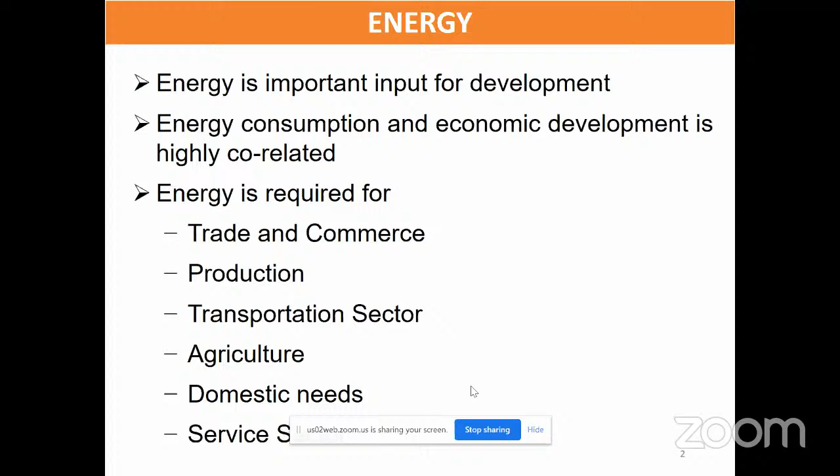Everywhere the sector needs developing infrastructure. Most office buildings are becoming air conditioned so that we can get more productivity from our workers. Earlier we used to have conventional sources of energy: thermal projects, hydropower projects, nuclear projects. After that we had non-conventional sources of energy: solar, wind, biomass, small hydro, geothermal, and tidal.

Hydro comes under conventional source of energy as well as non-conventional source of energy. The difference between these two categories: in conventional hydro, we construct a dam across a river, store the water, rising the water level by 100 or 200 meters, then we fall the water from that height for energy generation.

But in case of small hydro, we don't store any water. We just use whatever water is available in the river for power generation. So the difference is, during our monsoon period we have around 20 times the discharge available in our river. In conventional source, all that water was used by storing it, but in small hydro we don't store, so during monsoon a lot of water goes waste.

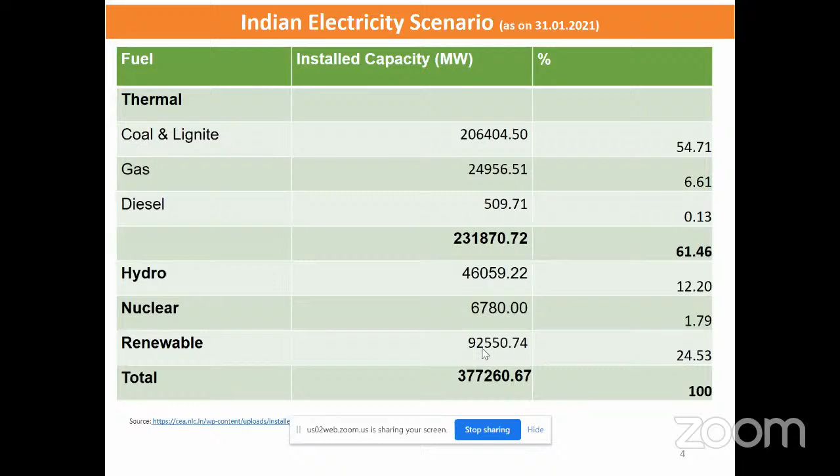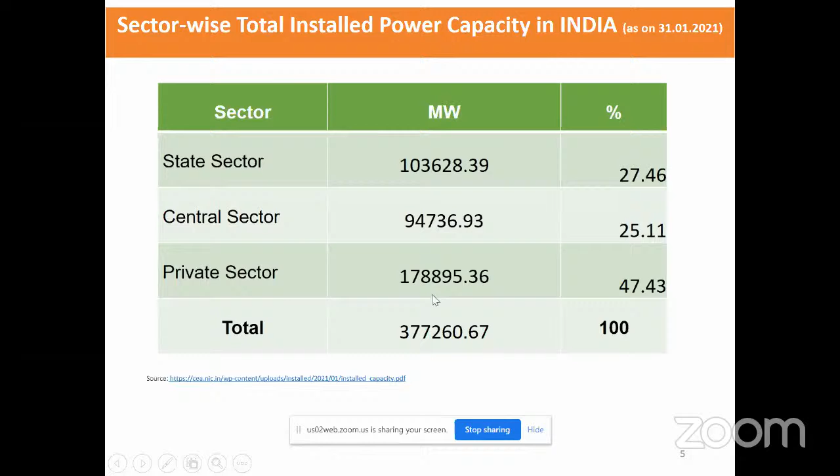Now the renewable energy contribution is 92 gigawatt, and the maximum has now come from solar power. Earlier wind energy was maximum, but now solar has taken over, and we have a lot of potential and plans for solar development. Maybe 2 lakh megawatt of projects are to be developed from solar energy.

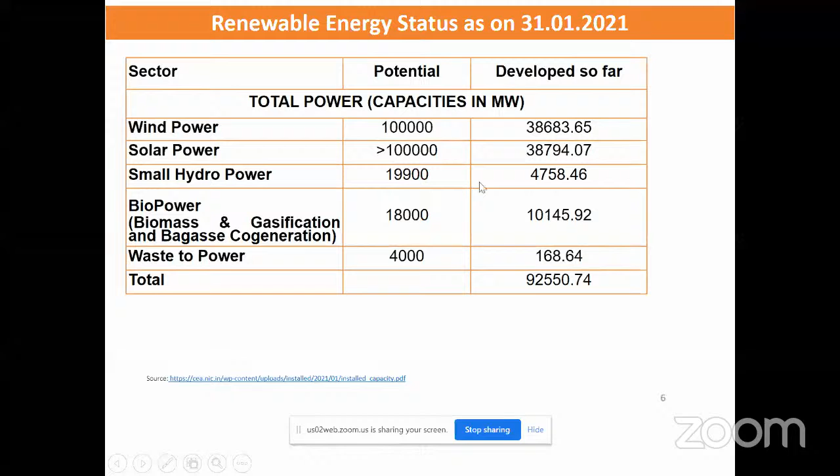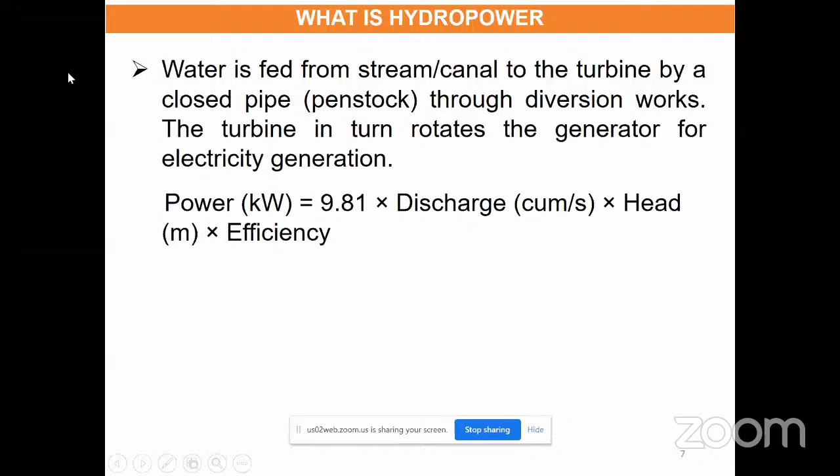This is a pure potential energy equation, and it is multiplied by an efficiency factor, because we cannot get 100% electricity by converting 100% potential energy into electricity, since all the equipment used in power generation has some efficiency. Now, head is the difference where power is generated at the powerhouse, and water is available at a diversion point. So the difference between the elevation of these two points is the head, as in case of potential energy also.

Now efficiency of our equipment, when we generate power from our hydro project: first is the turbine, then generator and gearbox. In the powerhouse, the potential or hydraulic energy is first converted into mechanical energy, because this energy rotates the shaft of our turbine. This shaft is connected to the generator. From generator we convert the mechanical energy to electrical energy. So first hydraulic energy to mechanical energy, and from mechanical energy we go to electrical energy.

So there is some efficiency loss due to turbine, some efficiency loss due to generator. Sometimes the generator and turbine have different rpm. To match the rpm, because the turbine generally rotates at lower rpm, maybe in the order of 500 to 600, the generator could be rotating at 1000 rpm or 1500 rpm. So there is a mismatch of rpm, and we need a gearbox in between. A 2% efficiency loss is there due to the gearbox, and combined efficiency will be turbine efficiency multiplied by generator efficiency multiplied by gearbox efficiency.

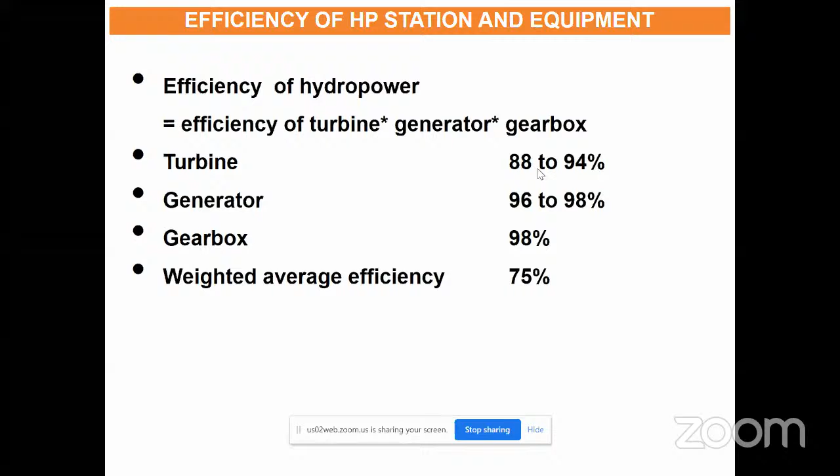And turbine efficiency, you just see it is 88% to 94%. Why is it so low? Because initially the turbine is at zero speed, and suppose the rated rpm at which power is generated is say 500 or 600 rpm. So from zero, when you start opening the valve, water starts going and it starts rotating. But if it is rotating first at 0 rpm, then 100, 200, there is no power generation. Only the energy available is consumed in running the turbine at that rpm. When the turbine reaches the rated rpm of 500-600, till that all energy available is wasted, utilized in running it, because sometimes the runner diameter of the turbine is 1 or 2 meters. So a 2 meter mechanical disc rotating at 500 rpm needs a lot of energy. That is accounted for in the efficiency of the turbine. That's why turbine efficiency is 88 to 94%, to take care of the energy required to run that heavy part at 500 rpm.

Why are these categories required? You will find a lot of changes in technology, and large and medium projects are commercial projects because they have to be designed and developed on a commercial basis. But small and mini projects get some subsidy from the central government to make them commercially viable. Micro projects of 100 kilowatt get around full subsidy — around 90% of the project cost is met by the central or state governments. So that's why we need these categories.

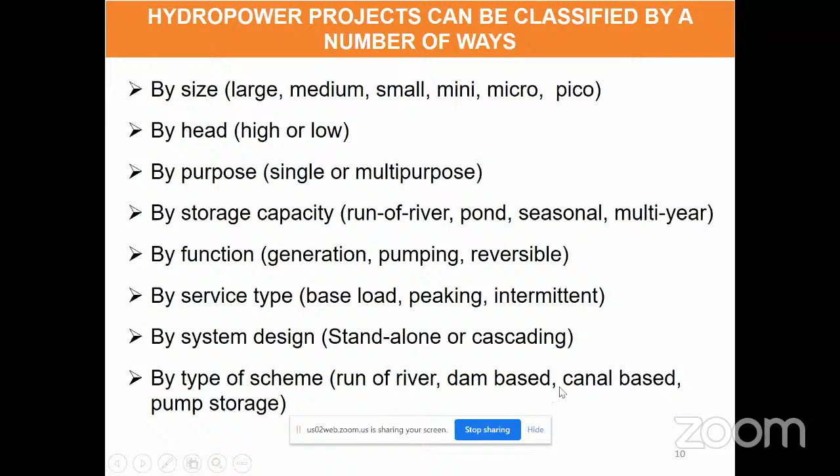Now by type of scheme, storage types are the same: run of river, dam based - when you construct a dam, and canal based - when you are developing the fall available in a canal. Run of river I've discussed a lot - no storage, output subject to whatever discharge is available. Canal based utilizes the fall available in the irrigation canal.

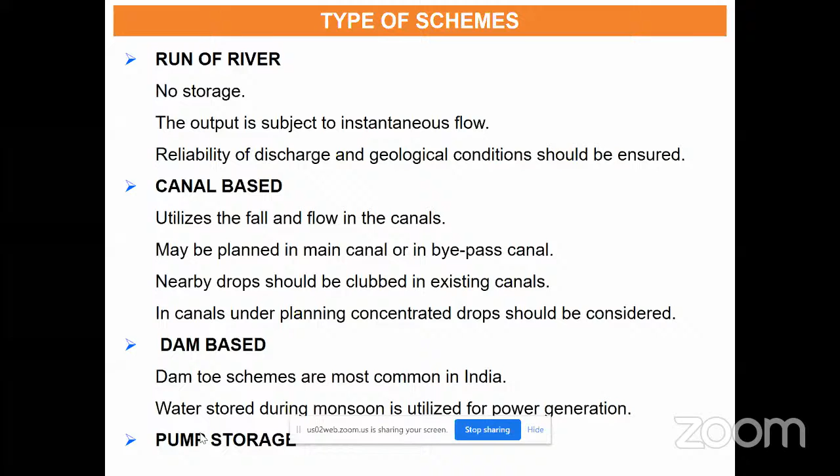Dam based - I'm discussing run of river or dam based basically, so you are not constructing any dam, you are utilizing an already existing dam. So when surplus water is there, that water gets wasted from the spillway of that dam, so that can be tapped for power generation.

This is a typical run of river hydro project. When water is going waste, flowing in the river, we divert the water for power generation through an open canal up to a tank at the end, called the forebay tank. From there we take a pipe for power generation at the powerhouse. After power generation, water is released back to the same stream. This is a very typical type of hydropower project.

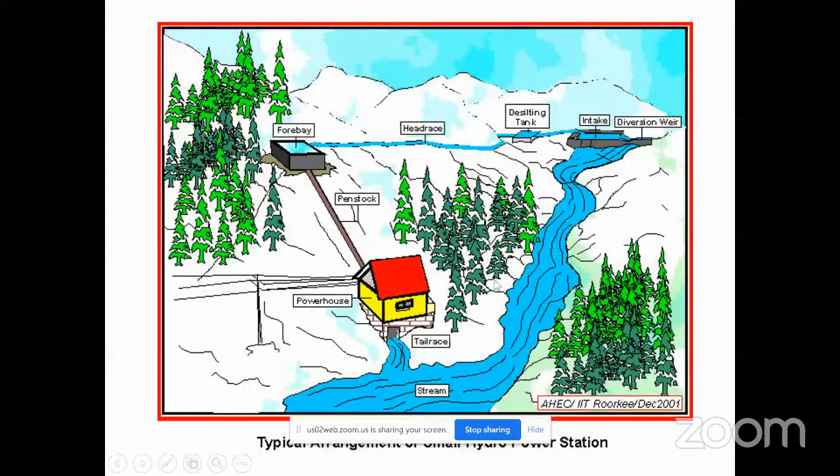Now the second type of project is canal based. All our irrigation canals mandatorily have a fall in the system. Why? The irrigation channel has a very mild slope, maybe 1 meter bed slope in 5 kilometers - you cannot visualize any slope in the bed of the canal. But our terrain, the normal ground, has a steeper slope, maybe more than 1 meter in 1 kilometer.

So our ground is sloping 5 times steeper than the irrigation canal bed level. This means after a length of 20 kilometers of irrigation, our channel bed is always higher than the ground. Initially we make it up by filling, but when the filling becomes too much, we provide a fall in the irrigation system, so that we cut our land and put it for filling upstream. So this becomes a fall.

These falls can be developed for power generation. Our center, personally myself, is involved in development of 21 falls in our Bihar project. They are around 20 megawatts of projects, and all these projects are being developed in consultation with our center. A lot of innovations were done by our center to meet the problems we face at these places.

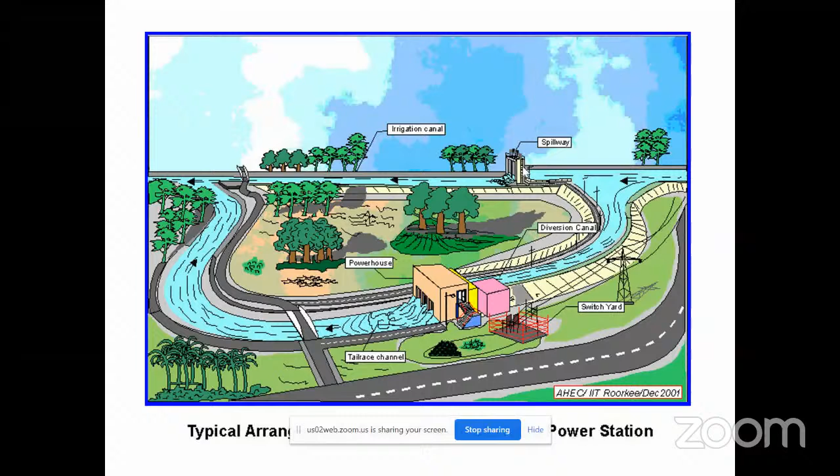Now the dam based project - what happens is a lot of the time this surplus water is going waste through the spillways. So we can use the under sluices already available in the dam body, and connect our pipe which is used for power generation. We develop a powerhouse which utilizes this to generate power.

Now I had shown the pumped storage configuration - upper reservoir, machines, and lower reservoir. Water from the upper reservoir comes for power generation at this project, and the water which is released is again stored at the lower reservoir. When we have surplus water, surplus energy available, that is used to run the machines in a reversible mode, pumping water back to the upper reservoir.

As an example, the Tehri project normal generation is a certain megawatt, but in the reversible pumped mode, it increases to 2000 megawatts. They have a lower reservoir - during off-peak hours, 1000 megawatt turbines are run in reversible mode to pump water from the lower reservoir to the upper reservoir. During peaking, the water already coming from the upper river is stored, plus the water pumped back from the lower reservoir is stored, so it becomes double the capacity.

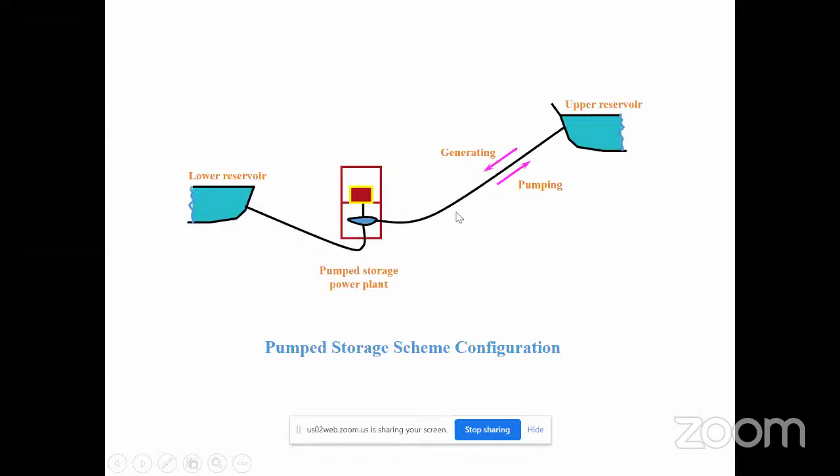Now this sketch shows the upper reservoir and our project here. Water is released downstream, and we have a dam on the downstream side also, so the water after power generation is stored in this reservoir. During off-peak hours, water is pumped back from here and stored, and during peaking, double the discharge comes from this reservoir for power generation.

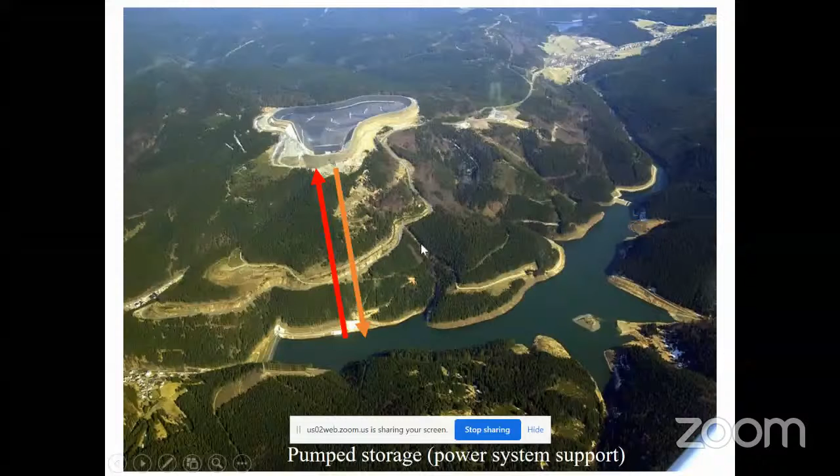Now, the resource assessment for SHP needs to be duly shared between governments because it is a state subject. Generally projects are multi-state projects. If it's a bigger size project of 25 or 100 megawatts, it may be located on one stream only, which is a state subject. But once it's on the boundary of two states, with central government also involved, sharing becomes important, because every state has to fix its share, so that some part of the power generated comes as royalty, and some part is based on investment done by the government. Social and private sectors are also involved in development of these projects.

Inventory of all possible sites is required. Earlier, when we started, a lot of projects came up with the government for resource identification only, because AHEC was involved in this under a UNDP project that came to MNRE to assess power potential sites. The first 400 sites in Himachal Pradesh, and a similar range in Uttarakhand, were assessed by our center. Our center was then called Alternate Hydro Energy Center; recently it was converted to Hydro and Renewable Energy Center. So AHEC was involved in potential assessment across all 13 hilly states.

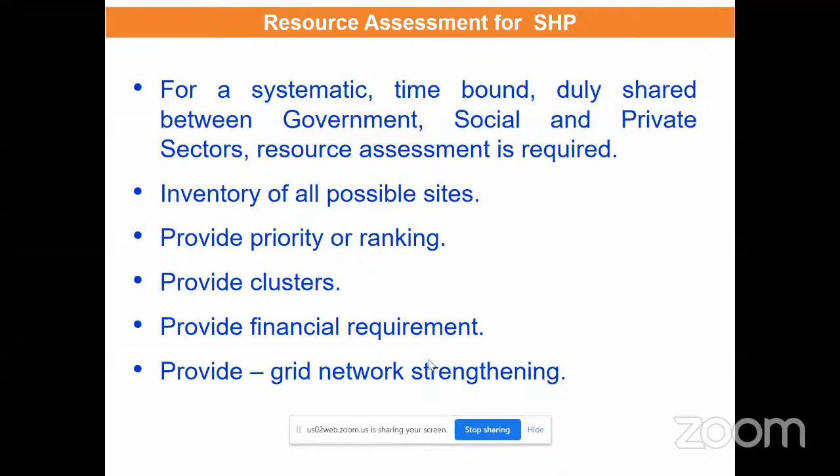For the SHP development, we don't have a systematic study. Sometimes projects are assessed by government agencies having project officers at district level. They keep sending information, and on that basis headquarters keeps gathering information. If we want to develop a project area, we need to go in a systematic way. So often we are working on an individual basis, but as time passes, individual projects become a cluster.

So maybe after 5-10 years a lot of data will be available, then we can make some integrated planning. Now, integration with other developments like irrigation, drinking water, industry, and so on.

Whenever we are planning some project, we should find out how much is the irrigation requirement in the area, so that we can make sufficient provision for that purpose.

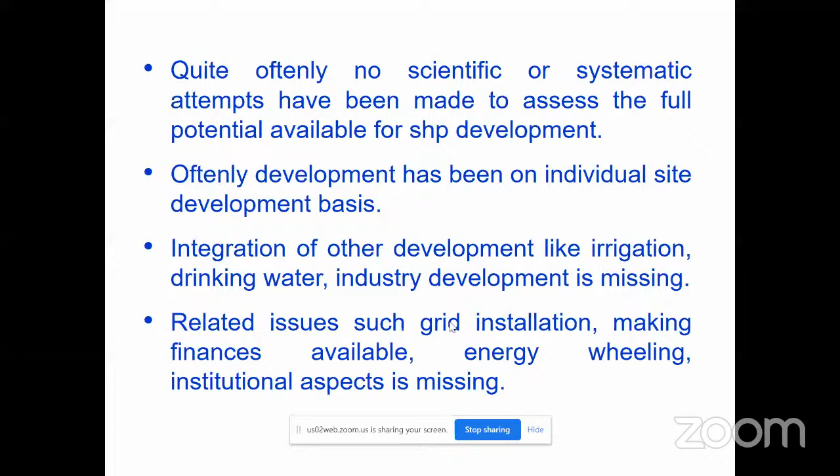Now, for potential assessment, earlier it was CEA who assessed the number of sites and the potential. Then AHEC came, the first project AHEC got from PFC. We identified, on the basis of the topographical survey sheets available with us, around 4,000 sites with 8,000 megawatt. Then MNRE sanctioned one more project, so finally it reached around 16,000 megawatt with around 6,000 sites.

Now one more term has come up, plant load factor. Earlier, the plant load factor was 75%. This is actually the utilization of the machines put up in your project. So suppose they are 10 megawatt machines, 75% means that 75% of the time in a year they should generate 10 megawatt. It means if you are getting more power, more discharge during monsoon, only the 10 megawatt corresponding discharge is utilized for power generation, the rest goes to waste.

But now the plant load factor can be as low as 25%. This means the machines put up at the project, if suppose there is a 10 megawatt project, should generate that power for only 25% of the time in a year, because in monsoon we should try to utilize the monsoon discharge as much as possible. After the monsoon period is over, our discharge is reduced, so plant utilization becomes around 25%.

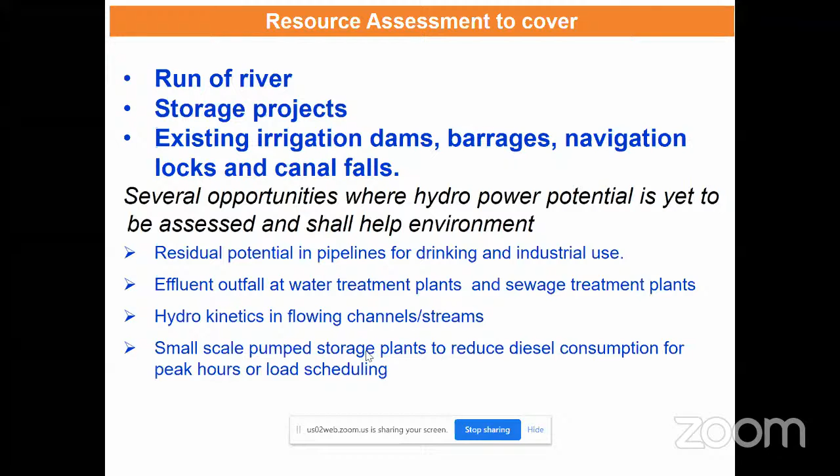In small scale pumped storage plants, the pumped storage which I had discussed about the Tehri dam can be implemented on a smaller size project of 50 to 100 kilowatt.

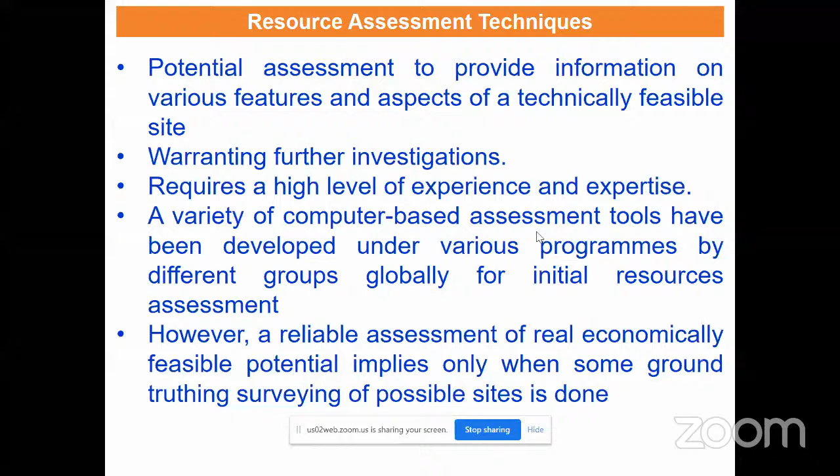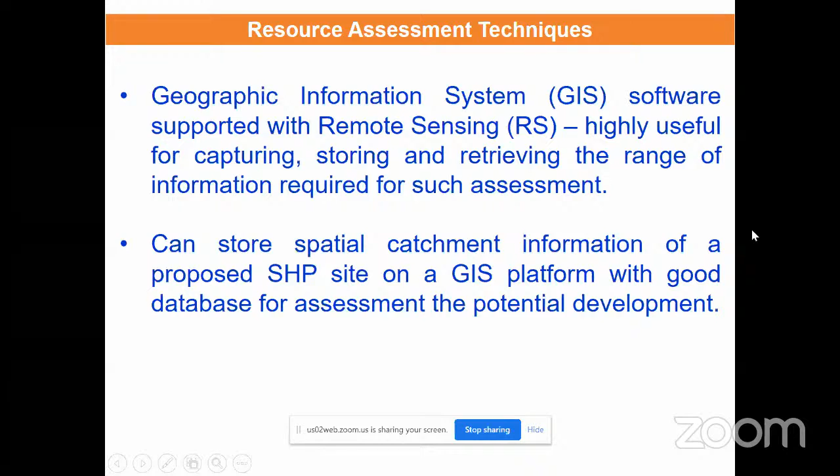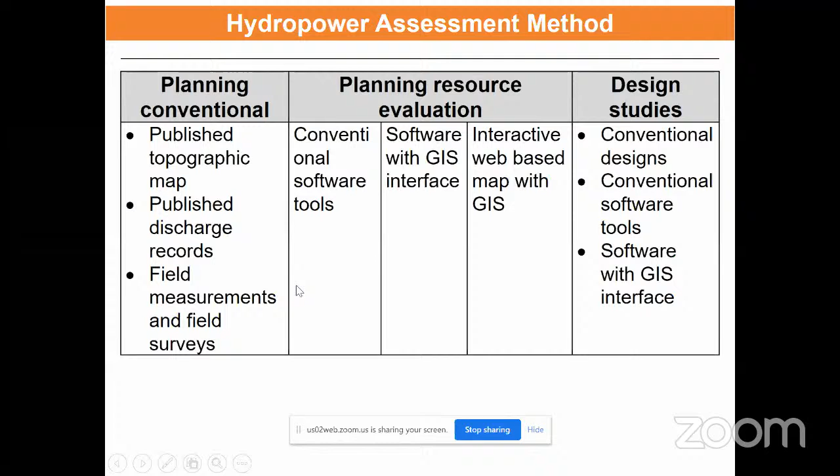For resource assessment, we had computer-based tools. We had developed models which can estimate the discharge availability and the head we require, using topo sheets available from Survey of India. On that basis, we can estimate the potential of the sites. This combined together we call geographical information system and remote sensing. Satellite images are available, and on that basis some study can be carried out. So conventionally, topographical survey sheets and some softwares are available which can help us in estimating the power potential.

Actually, the water which these black lines have is only from rainfall. Generally during the rainfall the water flows through these streams, but after that time no water is available. But some of the water in this area goes inside, percolated, and where you see a blue line, that water after traveling now comes to the surface. That's why every time in the year you see water flowing. So always put a project at this blue line, and just draw a catchment area line. You can predict very accurately, because topo sheets are available for the whole area in our country.

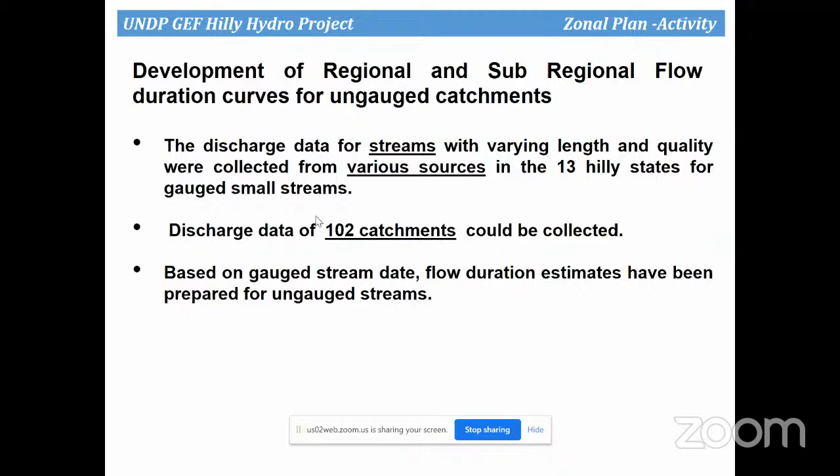You can plan the discharge available at this point by measuring the catchment area, then comparing it with adjoining streams where discharge is available for a longer period. So you can get some feeling of the discharge availability. Now, when we had planned for 13 hilly states, we developed a regional flow duration for all states, so that we can assess the discharge available for ungauged catchments.

For hydropower potential we computed at 50%, 75%, and 90% dependability. By 50% dependability, we find out how much discharge is available for 50% of the time in a year; similarly for 75% and 90% of the time. 90% means the discharge should be available around 10-11 months - this is the minimum discharge used for power generation.

When we allow for 50%, that means 6 months in a year - so we covered the monsoon period, plus maybe 3 months before and 3 months after monsoon, whatever maximum discharge is available for at least 6 months we utilize. So out of these three figures, maximum potential we got with 50% dependability. That exercise we did under UNDP.

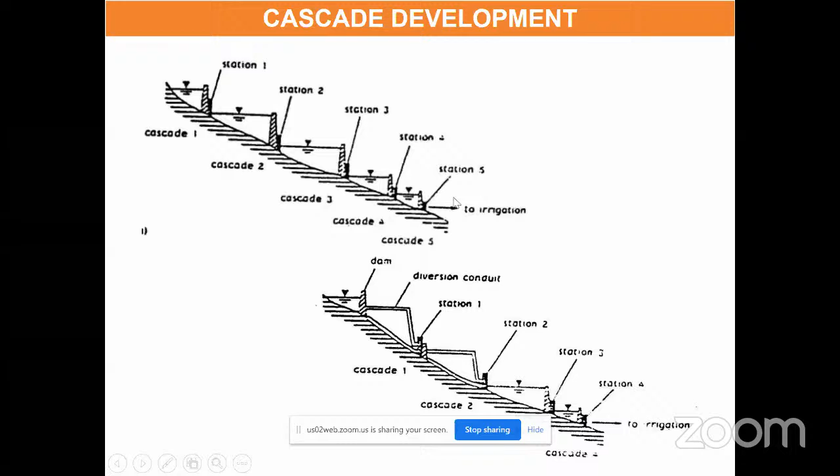This is a cascade development. What happens is one project is developed, then we release the water in the river, and the second project likewise is a cascade one. So this is a master plan of MP where we developed the sites in cascade mode.

Power transmission network is very important, which I discussed. For this study also we had developed this, it was not our work, because we need some data from the government agencies. So firstly we asked for the power network so that we can plan the project.

In one of the meetings at MNRE, I was there for J&K. They were to sanction around 20 projects of say 1 to 3 megawatt. So the concerned officials from J&K asked, sir, we should reduce the capacity of these 20 projects to half or less than half. Why? Because we have only 11 kV grid there.

I submitted there, sir, 11 kV is not a grid. You have to consider 33 kV as a grid. And sir, out of these 20 megawatt, don't reduce it to 10 megawatt, just take out 1 megawatt project. One megawatt will cost around 10 crore rupees, and under 10 crore you can plan for all these projects on 33 kV network. It is not that costly, 33 kV can cost around 50 lakhs per kilometer.

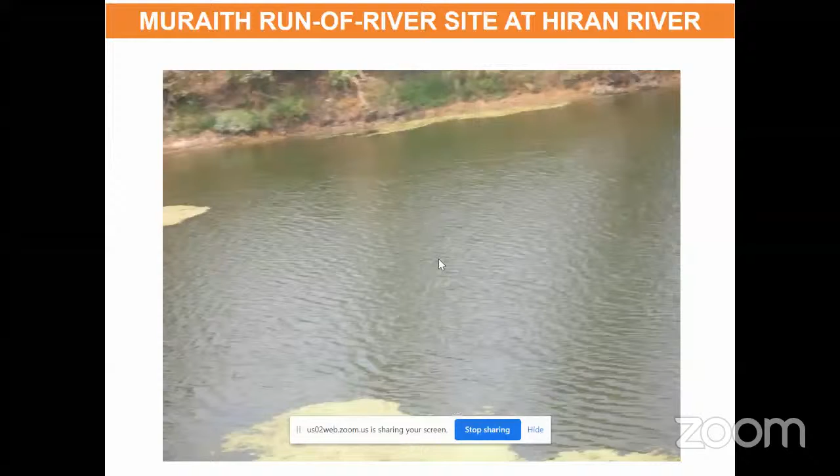This is one of the projects for which we prepared the DPR. You see it in a cascade mode. This is a river going - we have a diversion, take out the water, use that water for power generation, release the water in the river again, that water flows in the river, then again we tap it by putting a diversion and utilize it.

There could be a question: why can't we have this line extended directly up to this point? It could be, but if you are releasing the water here and tapping it again, the catchment area here will be up to this point, and at this point the catchment area will be much more. So maybe at this time twice the catchment, twice the discharge can be utilized for power generation. So it is a study you have to compare, whether to develop a total project.

Then a lot of structure will not be required, maybe cost may reduce drastically. And one more thing: if you had an option of developing say 10 megawatt, there could be various locations along the river. Suppose you want to develop a project of 10 megawatt, you had a choice - either use a 100 meter head, then more discharge is available, or you shift the diversion point slightly above so the head becomes 200 and you can reduce the discharge by half, potential same.

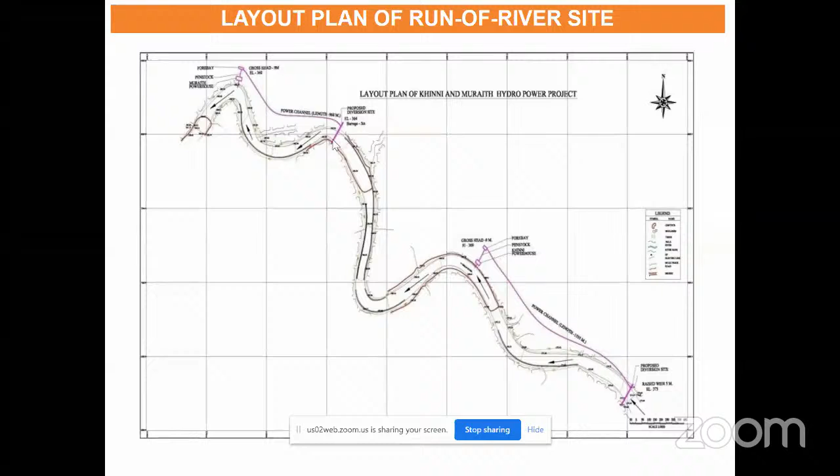That is so simple. Now, regarding the various alternatives: if you have water flowing, you can have a power channel to take the water and utilize it here. The other alternative could be to just make a tunnel. So there are many alternatives, you keep on studying, it is not that you can make a fixed guideline.

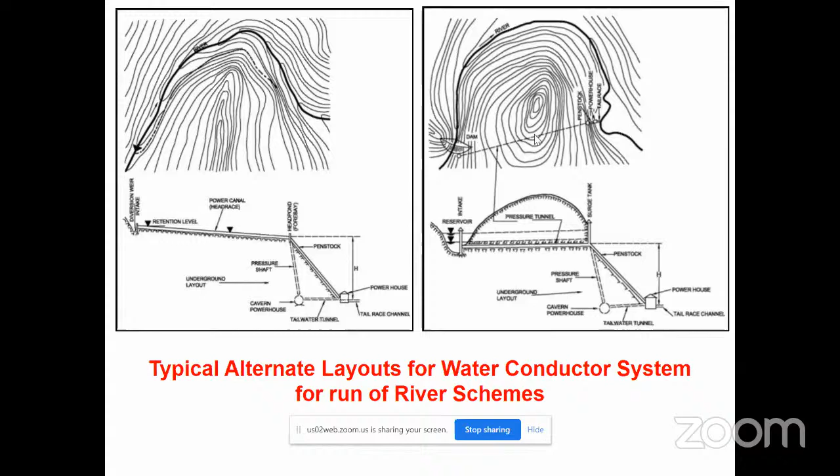Every site is a different site. You can plan only when you visit a site, and only then can you plan what is best for that site. Now, these are the different components of our hydro project: a diversion to divert water, then a desilting tank which removes the silt available in our system.

Why is this very important? In some cases, during monsoon, a lot of silt comes into the river. But there could be a possibility of very little silt available, so don't put desilting. But if silt is there, then it is mandatory.

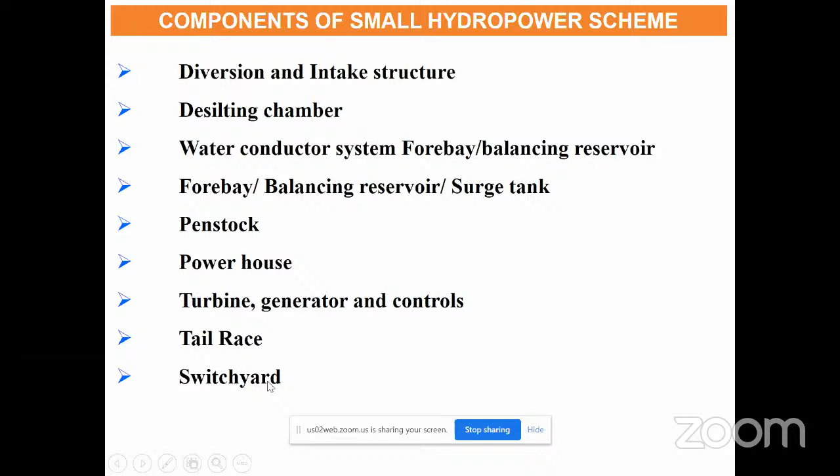Water conductor system takes the water for power generation at the end, forebay, from where a pipe called penstock leads to a powerhouse for power generation. In the powerhouse, equipment after power generation leads to the tail race, and the generated power goes through the switchyard to the grid.

Now we had three stages: a reconnaissance level, which we can say is preliminary, and PFR actually. Then we had a feasibility stage, because it's pre-feasibility, feasibility and detailed project report also. And finally execution.

Just so you know, at present our center is involved in 22 PFRs which we received from the Kargil area, J&K. Recently, yesterday only, we finalized our recommendations for that. So what happens is they had prepared a brief report of say 10-15 pages in the name of PFR.

So we had seen that out of 22 projects, we proposed that some projects be dropped, some projects be clubbed together. So after our observations and everything, 22 projects which were earlier there got reduced to 14.

So you know, an investment of 1 lakh per site could be sufficient to prepare a PFR. On that basis, you get a lot of information. You know what happens - when I was a member of a UNDP project...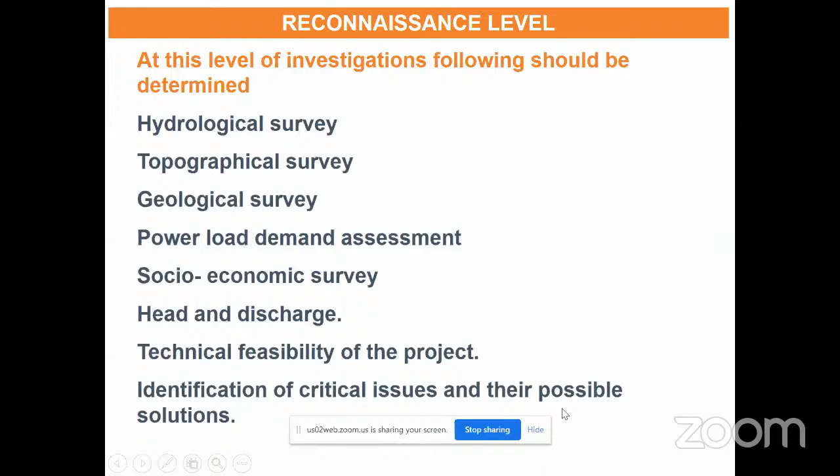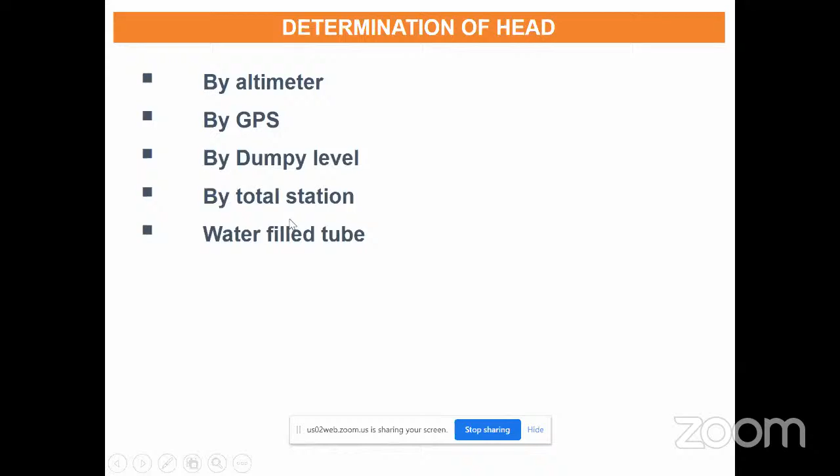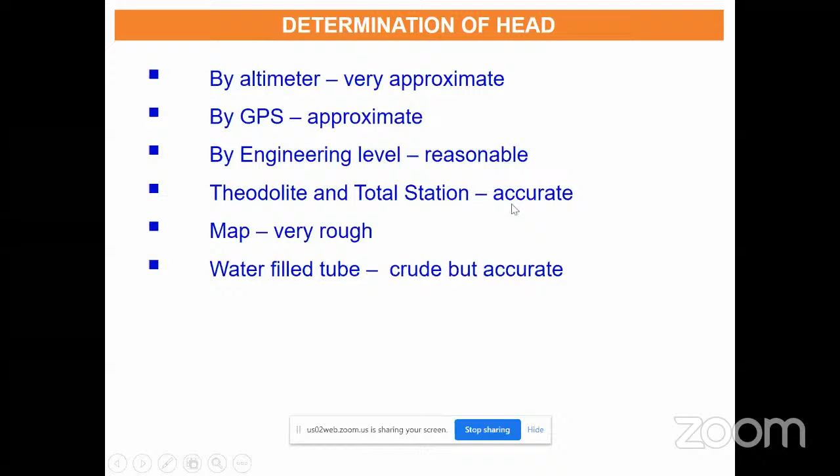So 10% grant was available from the users and 90% from the government. Likewise, the study was carried out, and for that you need to find out the head. The reconnaissance survey can be done using an altimeter for the head and GPS. The total station can be used for the detailed project study. For the head, altimeter and GPS give very approximate values. If you use a theodolite, a very accurate head determination could be achieved.

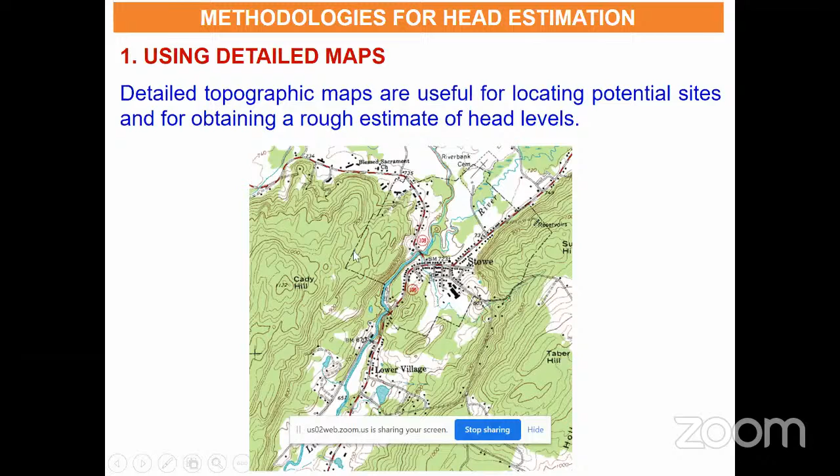Now detail maps are survey based, which I told you have contours shown on the ground on these sheets. So you can find out the difference in levels, and you can find out the head available. This next one is a very crude method.

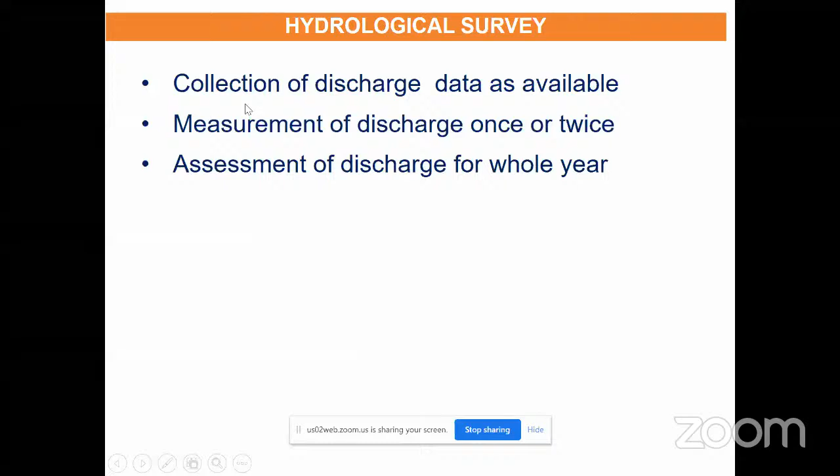In the power equation, there was the head, and second is the discharge. For the discharge, a lot of methods I had written here, and these investigations are required.

Some more investigation has been added when you are preparing a detailed project report - an environmental survey is required, and a survey for construction material, because when going for construction of a project, you need to know from where you get construction material. Power evacuation also requires a survey, to assess the cost of the line.

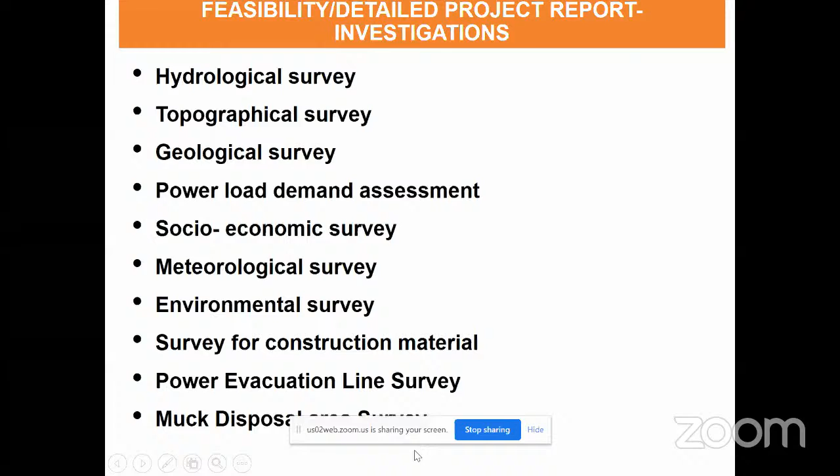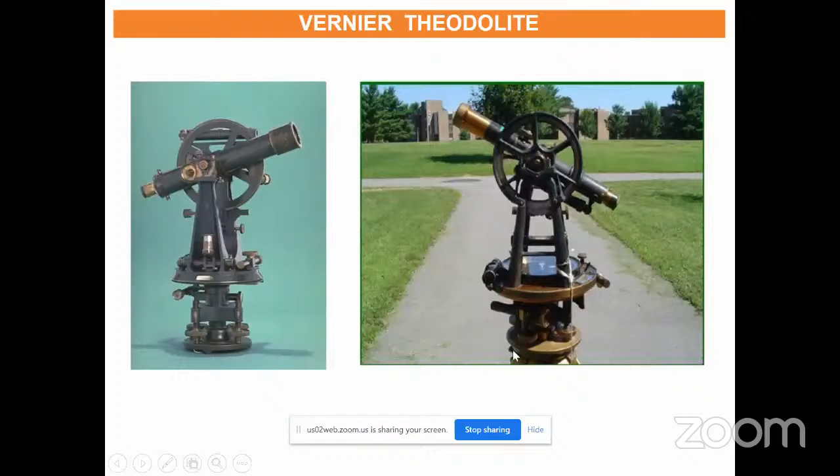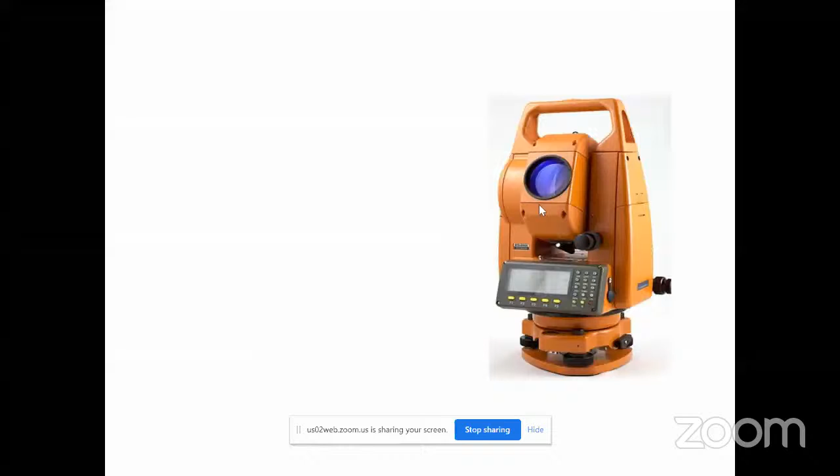A total station is there, which you can use to prepare a very detailed map. In case of the previous equipment which you had seen, you have to find out the contours, find out the level of the point, and after that you need to draw a contour yourself.

Actually, what we say - the topographical survey gives 2D information, just like GPS, showing where the location of our diversion, powerhouse, penstock, etc. are. These are the 2D information. But in the third dimension we need to know the difference in elevation of our diversion and powerhouse, so that difference between these two can be used for power generation - that is the head available.

In case of a total station, it automatically saves the elevation of these points. Suppose there are 100 points, elevation has been collected during the survey. So you get all points of equal elevation forming a contour. What we do is join all points of, say, 100-meter elevation, 200-meter elevation, 400-meter elevation. You will not see any line on the ground joining these points - that's why they are called imaginary lines, but they are very important.

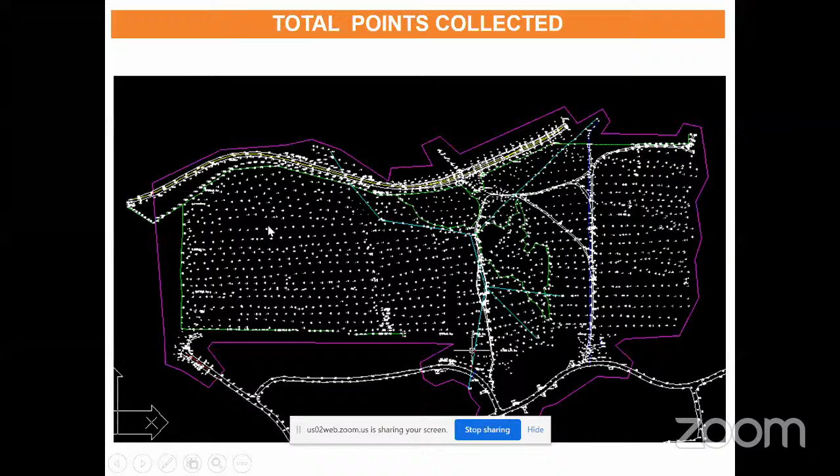So these points we had elevation also. After that we just join them. You see these are straight lines, but these are not the contours, these are the points surveyed. After that we know the elevation of these points, and all points of equal elevation are joined together, so they become a contour.

Now flow measurement is very important, and you have to measure it very accurately. Generally we get a discharge observed through a rectangular notch. What we do is make the river section flow through a rectangular portion, and we measure that portion. So if we know the length and the water depth, the discharge can be calculated using this analytical equation.

If the discharge is less, a V notch can serve the purpose, and in that case we don't require the width in this formula.

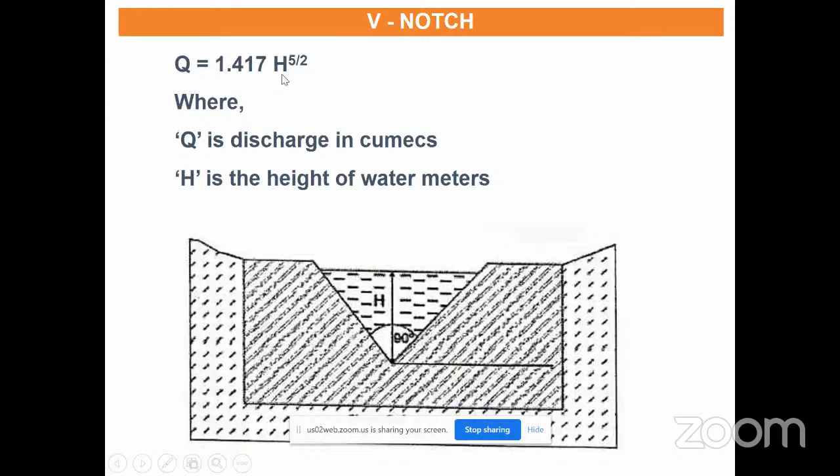And now, when the river is very wide, we use the area velocity method. This shows the cross section of the river where the discharge is flowing. We divide the whole width into maybe 10 equal intervals, and these are the depths at different points along the width.

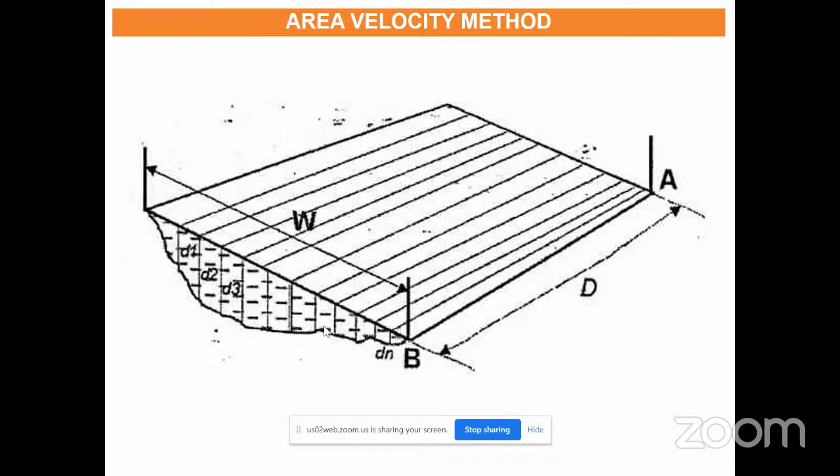So we know the water depth and the total width, so we can calculate the area available for the discharge flowing. We measure the velocity at these sections, and then we calculate the discharge available for power generation.

Now there is one more method for a turbulent stream, where in a hilly area you don't have any means of having a V notch or rectangular notch like this one. For a turbulent stream, a very good method is available - that is the salt method.

This is a flow which is a turbulent stream. We start pouring salt here, and after a distance of say 25 times the width of the stream downstream, we start taking a measurement, and directly we get the discharge of this stream - provided this is turbulent enough that the salt is thoroughly mixed at that section.

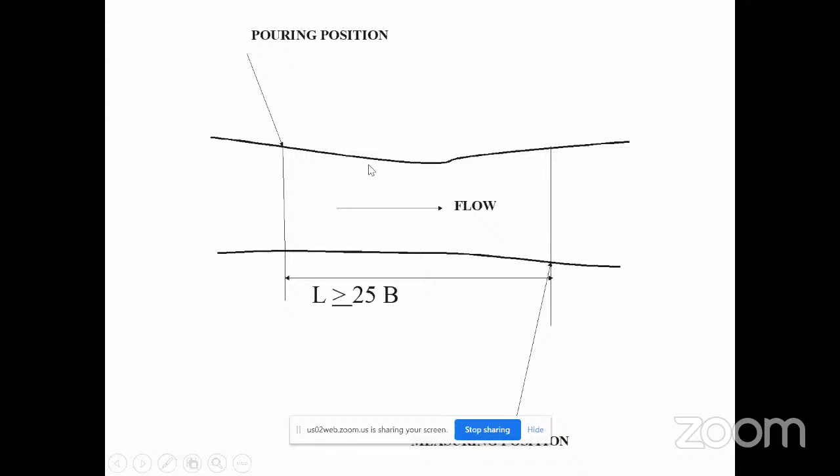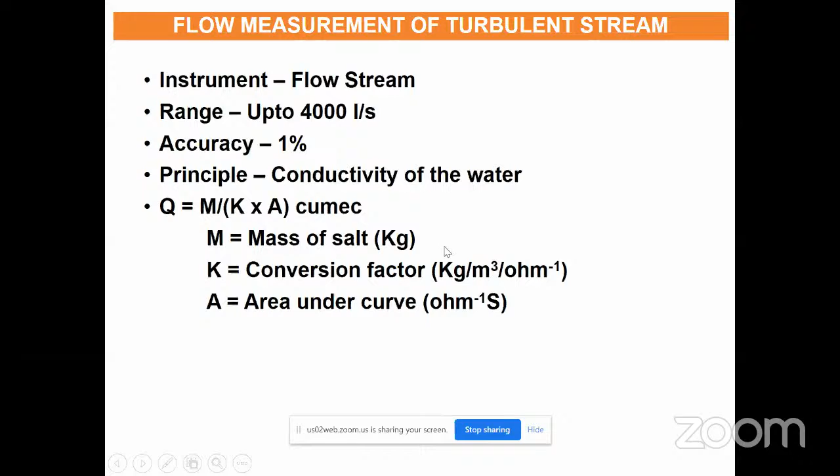Now I will show you the relations available for this salt method. This is the equation: the discharge is M upon K into A. M is the salt used for this measurement, K is the conversion factor, and A is the area which you will see here.

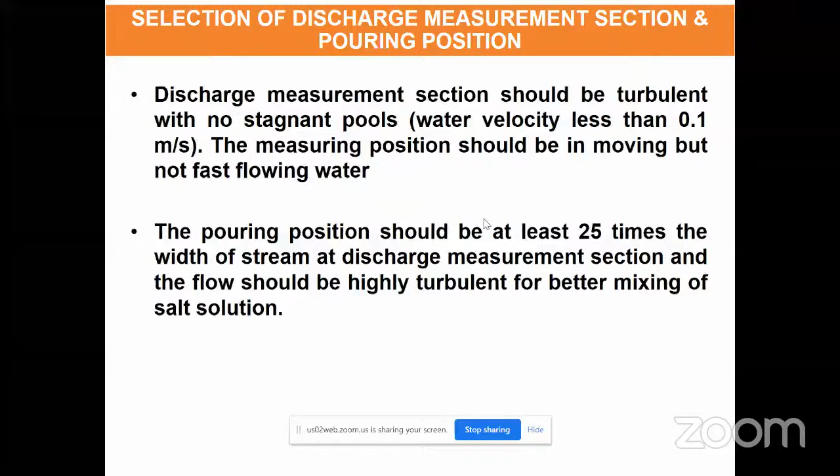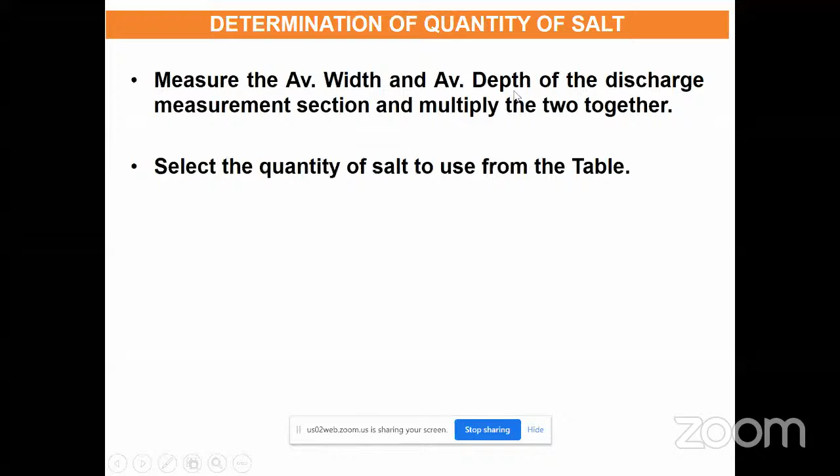So you calculate the area, and the salt used will directly give you the discharge. For that purpose, the pouring station should be 25 times above the measuring station. And you can calculate the quantity of salt to be utilized by calculating the average width and depth of the measuring position.

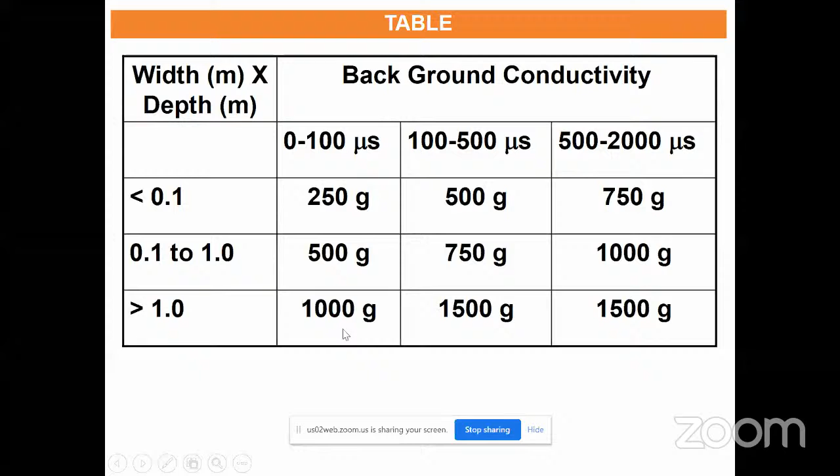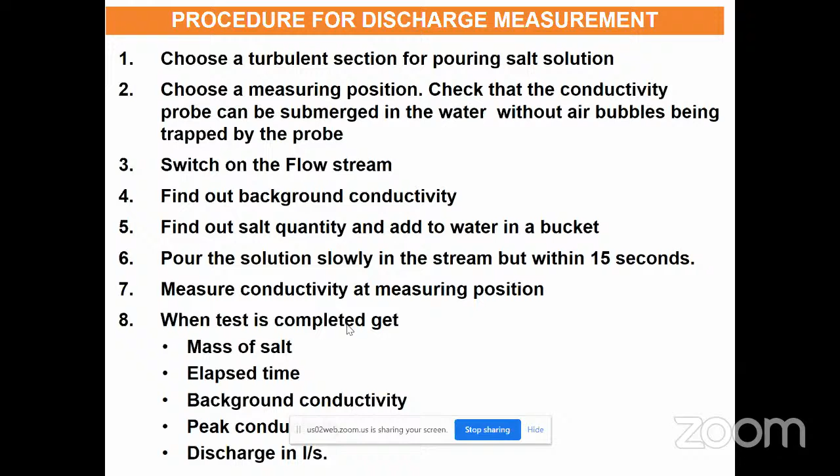Now, I had told you the steps of measuring the discharge using the salt method. After this, we had calculated the discharge available, and we had calculated the head available.

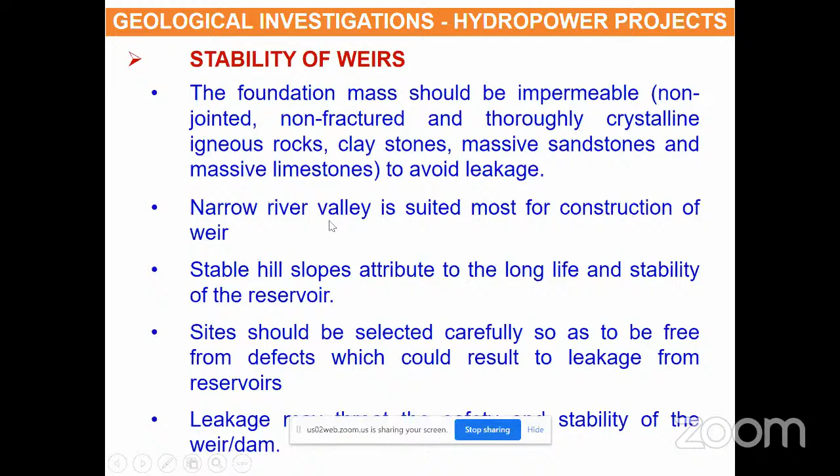So in this method, we had shown you a very important point: we are putting a project, so I discussed where to locate a weir. The weir should be located where there is a minimum width of the river with stable slopes - you should select a site. The site should not have residual soil deposited in the river.

Landslide area should be avoided. Glacial moraine should be avoided.

Okay, load demand survey. I told you that you cannot. So when you do this, this is location of the weir. I had not discussed other locations like the forebay, and they are not affecting things.

They will not affect the power potential. Only power potential will be affected if you locate the site of the weir upstream. Your discharge will reduce, so you get less power. If you locate the site downstream, your discharge will increase, you get more discharge but less head. So the location of the weir is very important.

When you do a load demand survey, take everything into account in load demand: what is the domestic requirement, what is the street light requirement in the area, and growth in the load demand, because generally we project the load demand for 10 years.

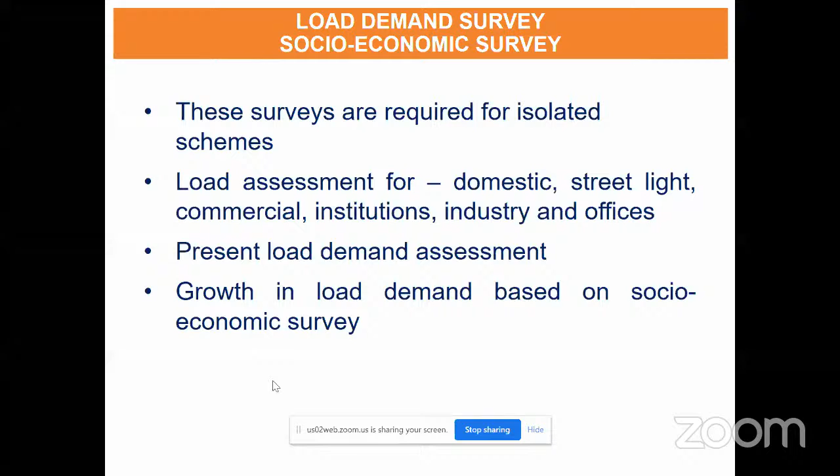How much you can consume, put up the project of that capacity. Meteorological survey is for assessment of the catchment area water availability. Construction material survey tells you from where your material will come when you develop a project.

Environmental survey - earlier we were not aware of environmental concerns, and the whole water was being diverted for power generation. Later these things have come up. Now it has become mandatory that you take the total discharge, collect the information, and 10% of the discharge during the lean period should always be flowing in the river for environmental reasons. That has become mandatory.

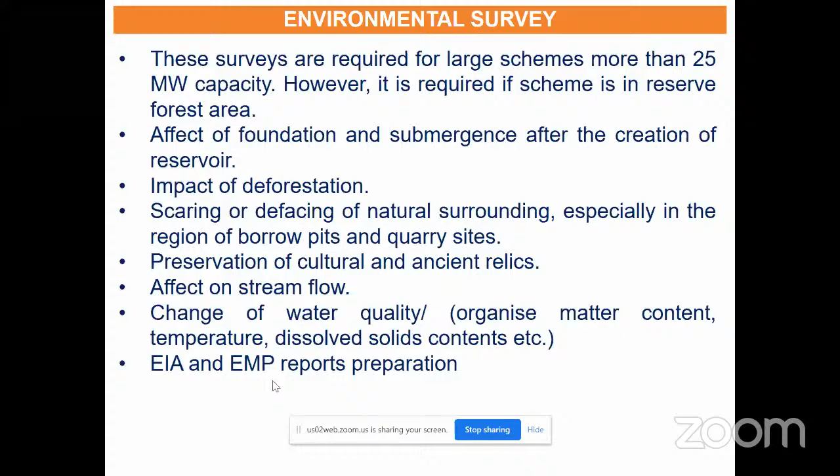Now, during execution of the site, certainly a lot of things are required. You need to find out the geotechnical conditions. Although the geotechnical investigations are done during detailed project investigations, a lot of geological surprises are there. Maybe when you put up a plant, say you are constructing a tunnel, at the site you will need a borehole just to find out the geological conditions.

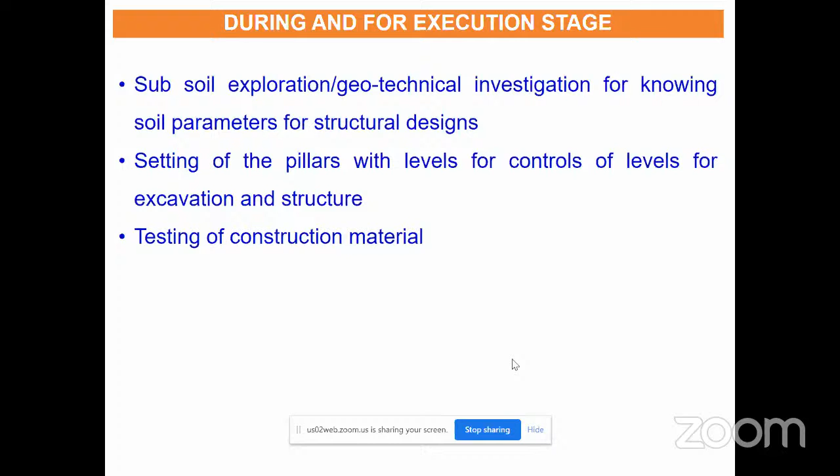When you make a tunnel of say 2 meter diameter, maybe a lot of things are changing, so a lot of change may be required when you do the execution.

Site selection - I discussed that when you are having a weir, these are the normal trends which you will find. It should be narrow, because it will be very costly if you have a bigger length. This is the ideal site, because turbulence should also be avoided when you have a weir site.

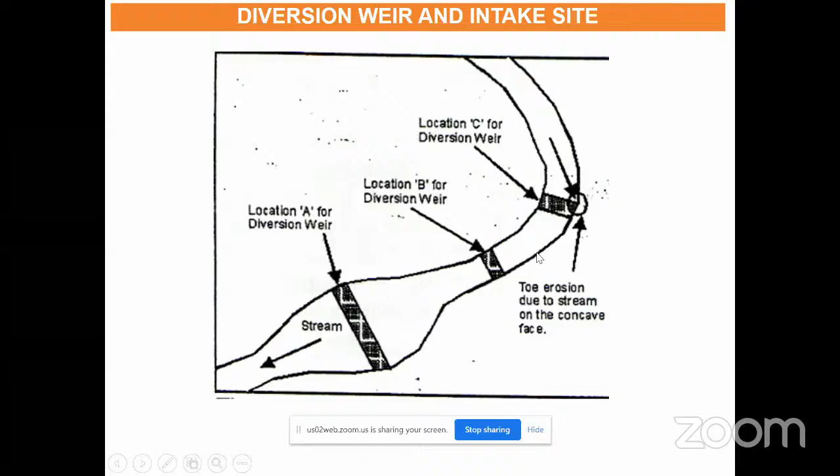Now, for the desilting site and forebay site, a lot of things may have to be seen: flatter land so that construction is easy, cross drainage meaning you should not have any stream nearby, and a slide zone should not be there. The same criteria should apply for the forebay and other components.

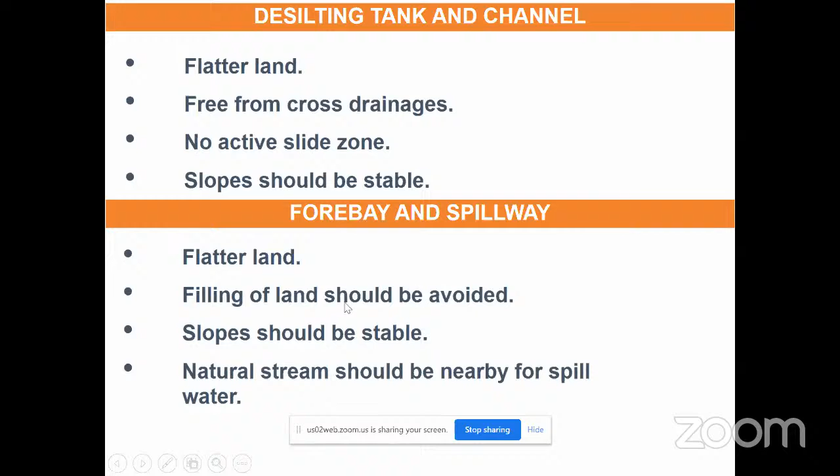For the penstock, it should always be laid along the top of the area, because the penstock runs from the top of the hill down to near the river, where the powerhouse is located. So whenever it is laid, it should be laid at the highest point in that land.

Otherwise, what happens during monsoon? The water flows - if it is at the lowest point, water flows in that narrow gorge, so it becomes damaging.

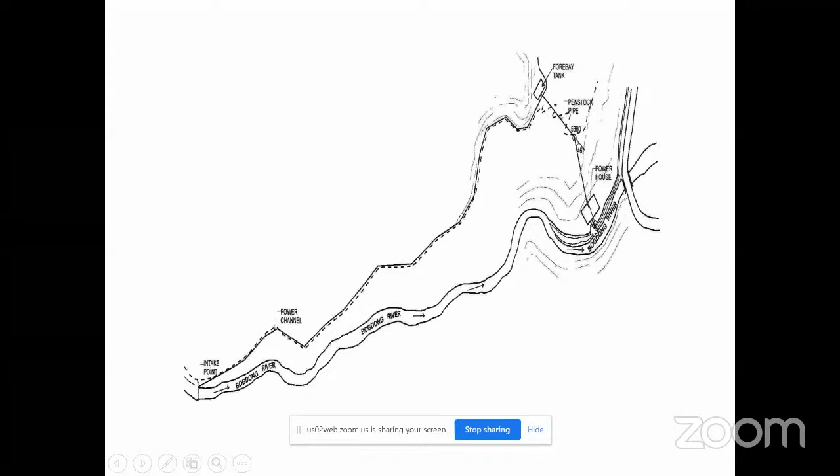Just see here, this is what I was telling. These are the contours which our total station will draw. These are the pointed nodes where our contours are taking a turn.

If pointed nodes are away from the river, that shows a stream flowing. When the pointed node is towards the river, this shows the highest point in the area. Water cannot flow along this one; water has to flow on both sides to reach the lowest point. So this is the best site for our penstock alignment.

Now these are a few more slides I had added. Basically, when we plan our power projects, we are very much critical about the head assessment. So we draw a water conductor system - this is the diversion point, desilting, then channel, and the forebay. We have to find out the head available, the level difference between the forebay and the powerhouse.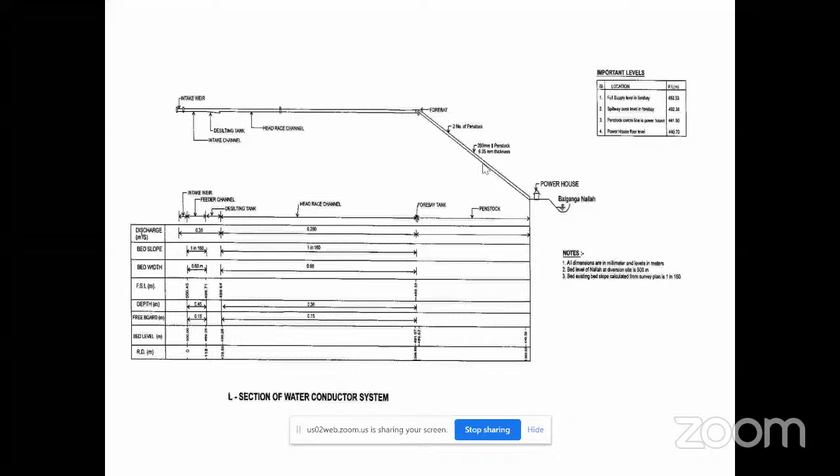And how much loss has occurred in the pipe between the forebay and powerhouse - that is a loss to our part, because in the power equation of potential energy, 9.81 Q into H, H is the head available excluding head losses. So we are very much concerned about that.

So this is the discharge data which we had collected by our various methods.

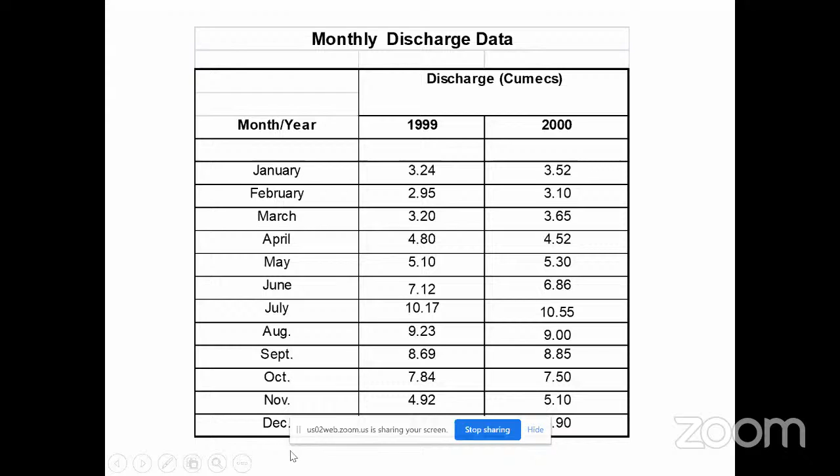Now this discharge data we had arranged in a descending order. I had shown the monthly data - average monthly data for January, February, up to December - and this data I had arranged in descending order.

This data is available for 30 days. The remaining 11 months' data is reducing. So 50% means this data or higher discharge is available for 6 months, and the rest are reducing. The lowest one is the minimum discharge. This is called 100% dependability.

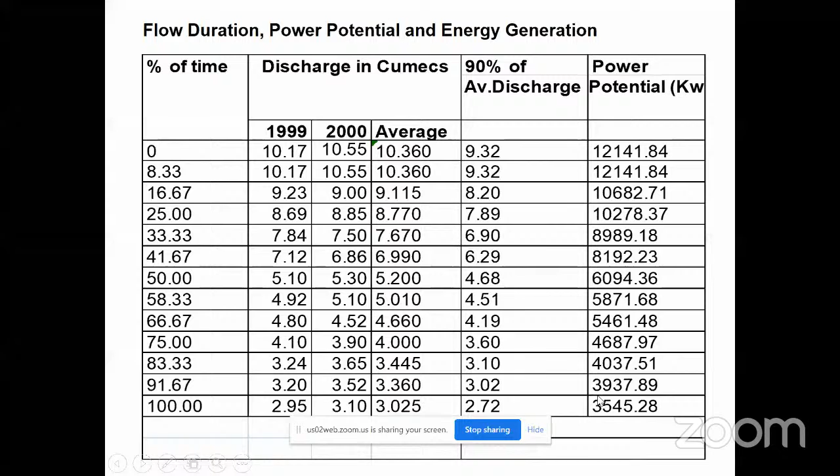So I had discussed about 50%, 75%, 90%. At 50% means 6 months' discharge data, and the corresponding potential is 6 megawatts. At 75% time, discharge available is 4.1 or higher, and potential is reduced from 6 to 4. Around 90% dependability, again the same, no change in the potential.

Then I had developed this flow duration curve, which shows that 100% minimum discharge throughout the year is this one. This shows us that generally our projects are connected to the grid.

So the discharge available for 50% of the time should be developed for power generation. If you want higher dependability, meaning you are reducing the discharge, then you have to calculate how much extra expenditure you are doing, as increasing the machine size increases structure cost and equipment cost. With higher size machines, you will certainly generate higher power, but only for the monsoon period.

So you have to calculate that total expenditure is this, then total revenue is this. So what is the generation cost now?

We calculate the generation at different dependability. If we put up a plant of two machines of 750, maximum power potential is 7 megawatt, but we are generating only 1.5 megawatt. We can have two machines of 1000 kilowatt. That's why we do a water power study, to show how much we are generating, what is the plant load factor, and how much energy we are generating.

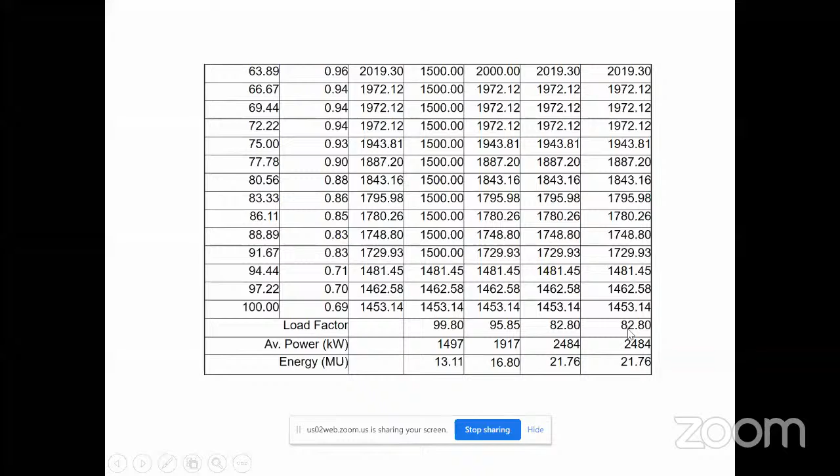So I had given a small example where, at 50% time, this shows dependable discharge: 50% is 8.8, 75% dependable is 7.5, 90% is 6.5. So it's reducing, because if we want a discharge 100% available, that means minimum discharge in winter, so potential discharge is reducing.

So we calculate power potential at different dependability by changing the discharge, keeping the head same, because head at each dependability will remain same. So we fix up what potential is to be utilized, then we just calculate how much energy.

We generally have two machines minimum, because during winter our discharge reduces to half. If we provide only one machine, the efficiency is 10% reduced at winter discharge. So it is better to have two machines of equal size, half of the rating. When the discharge reduces, the other machine will run at full power, 88% efficiency.

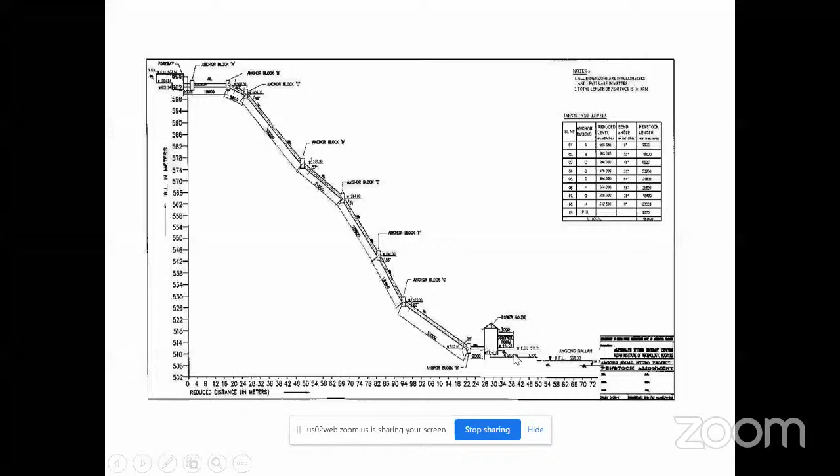So we calculate the level in the forebay and in the powerhouse, and the penstock length, accurately calculating the loss. In this case, the length was 162 meters. The main loss in the penstock is friction, which depends upon the Reynolds number and friction factor. I had given you a curve required for calculating the friction factor loss.

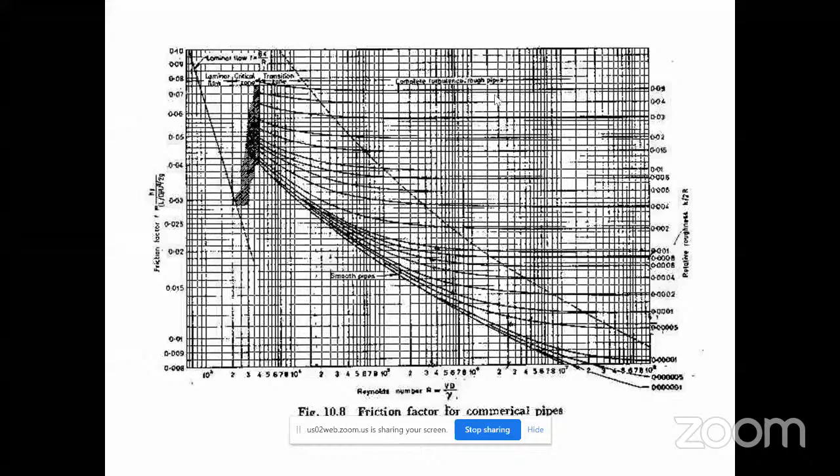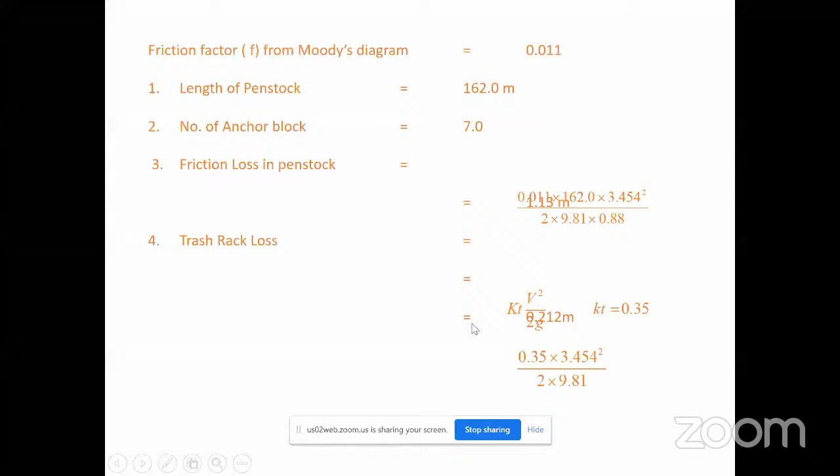These are the losses which are there in a penstock system. Just see the length and friction loss. I had given a formula, FLV square by 2GD. So this formula is given, and other losses are calculated. The friction loss depends upon this.

Then I considered exit loss, bend losses, and calculated total loss. Total loss was 4.33 meters in this system. So basically, from the level difference between forebay and powerhouse, I have to subtract 4.33 to get the head for power generation.

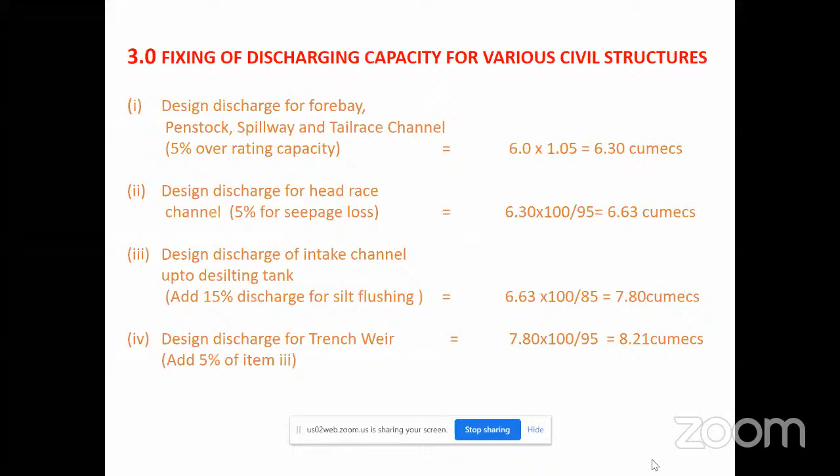Yes, let me check this up, whether for calculating...

Just see the level difference between the forebay FSL and the powerhouse level. The total head level difference was 96 meters, and 4.33, which I calculated at the end of my table, is the loss in the penstock from forebay to powerhouse. So after subtracting, it is 92 meters. This 92 meters was used in calculating the potential of this site.

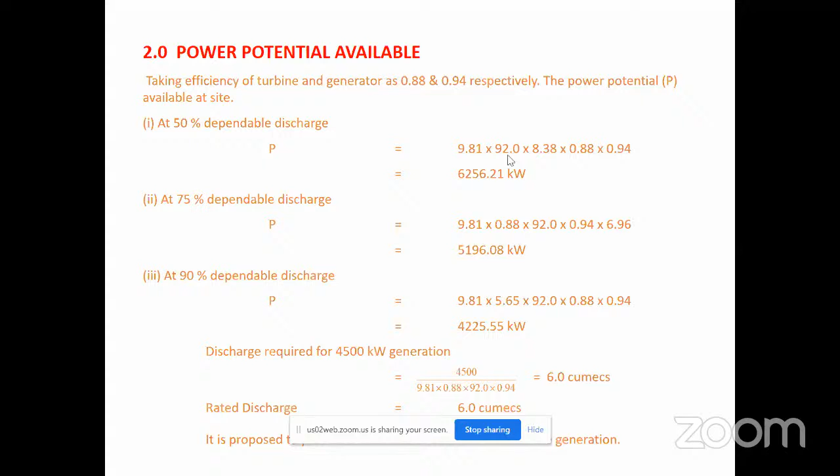I had shown these two slides more, because the head which you are getting is not always the same. I had shown one type of turbine, a Pelton or cross flow turbine, where the powerhouse level is considered at the center line of the penstock going into the powerhouse. So the level of this penstock and the level of the FSL in forebay had a difference of 96 meters.

But in other types of turbines, called reaction turbines - Francis and Kaplan are in that category - we get slightly more head, about 1.5 meters more, because there we consider the water level where it comes in the flowing channel.

Basically, where we get air in contact, in case of a Pelton turbine and cross flow turbine, the water discharge comes out from the nozzle as a jet, and water gets in contact with air there. That's why we get the center line in case of a Pelton turbine and cross flow turbine. But in case of a Francis turbine or axial flow turbine, I had shown this one.

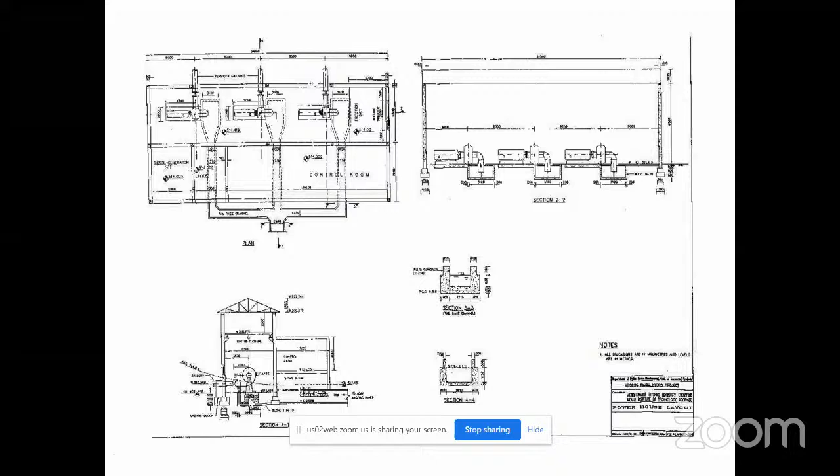Water is under pressure here also, negative pressure, and it comes in contact with air in the tail race channel. So the forebay level is the same in both cases, but the powerhouse level is not at the center of our penstock. It is at where it is releasing water in the tail race channel.

So in case of a reaction turbine, we get around 1.5 to 2 meters more head in comparison to a cross flow or Pelton turbine.

But there are other considerations also. The cost of these turbines, Francis type, are more, and maintenance could be more, maintenance cost more. So a lot of things are also to be considered.

As we are concerned, only with head availability and potential, there is one more point to be considered: the type of turbine. When we go in very detailed terms, otherwise normally whatever the water level, whatever the elevation of our powerhouse, whatever the elevation of our forebay, take the difference and take around 8 to 10% as losses when the water runs from the forebay to powerhouse.